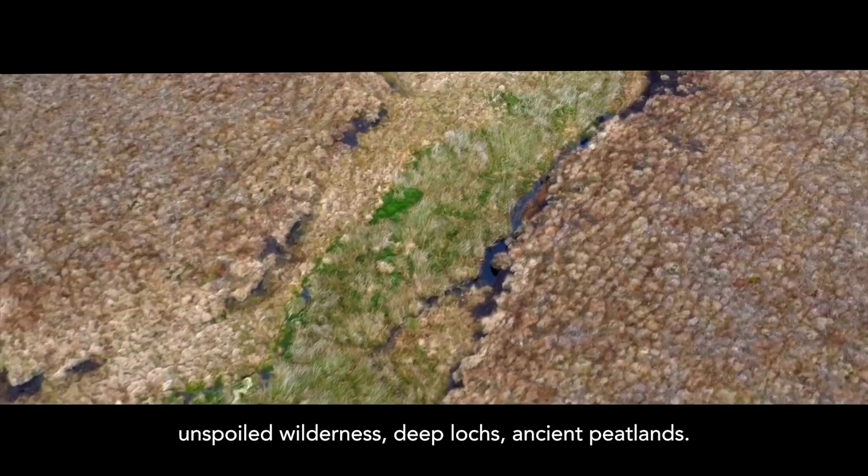Scotland is blessed with natural beauty. Unspoiled wilderness, deep lochs, ancient peatlands. Our rugged coastline spans around 12,000 miles, from wind-whipped beach to surging shore to far-flung fishing ground. For millennia, folk have lived in this landscape and relied on its natural gifts. In our modern world, we still depend on nature, and water is perhaps the most priceless resource on the planet.

In Scotland, we may feel like we get a lot of rain, and due to climate change, it now rains 13% more than it did 100 years ago. But today's rainfall comes in surges, so it's harder than ever to manage Scotland's water. Heavier rain washes peat off the hills, organic matter can make some water discoloured, and warmer water takes more effort, science and money to make safe and pure. To keep our water the way we like it, cool, fresh, clear, straight from the tap.

So let's spare a thought for what it takes to pipe Scotland's water to your home while you run a tap, brush your teeth, take a shower, wash clothes, make soup, enjoy a cuppa, water your plants or flush the loo. Scottish Water produces 1.5 billion litres a day, every day.

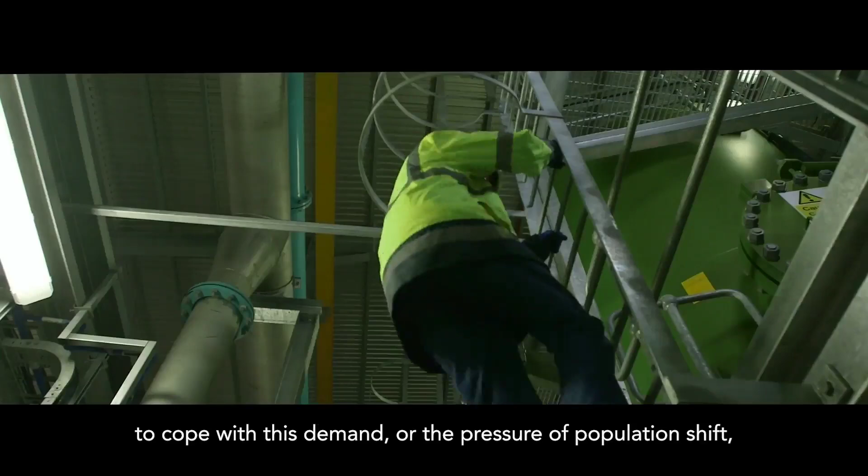The average person in Scotland uses about 180 litres of water a day, far more than people in England and elsewhere. Our infrastructure was never designed to cope with this demand, or the pressure of population shift, or the extremes of climate change. Scottish Water invests over £800 million a year in infrastructure to keep our water system running.

We also look after more than 60,000 miles of pipes, over 2,000 treatment works, and around 300 reservoirs, all to ensure that everyone has access to beautiful, affordable water, but also to ensure that wastewater is thoroughly treated, recovering resources as it's safely returned to the environment.

It takes more than 4,500 people to provide Scotland with quality water and wastewater services we've all come to know and expect. Engineers, scientists, customer service representatives, computer technicians, security analysts, the maintenance teams you'll see out and about in our distinctive vans, even water tasters.

On average, our expert water samplers test the water we supply to your taps every 2 minutes to ensure its purity. The water we all take for granted is a massive undertaking.

Scottish Water is publicly owned, and every penny we make is reinvested for public good. In return, all we ask is that all of us respect this precious resource, to value this astonishing stuff which literally falls out of the sky, because water is vital to the health, well-being and prosperity of the nation to help support a flourishing Scotland.

Scottish Water. Cool, fresh, clear, and only available right here.

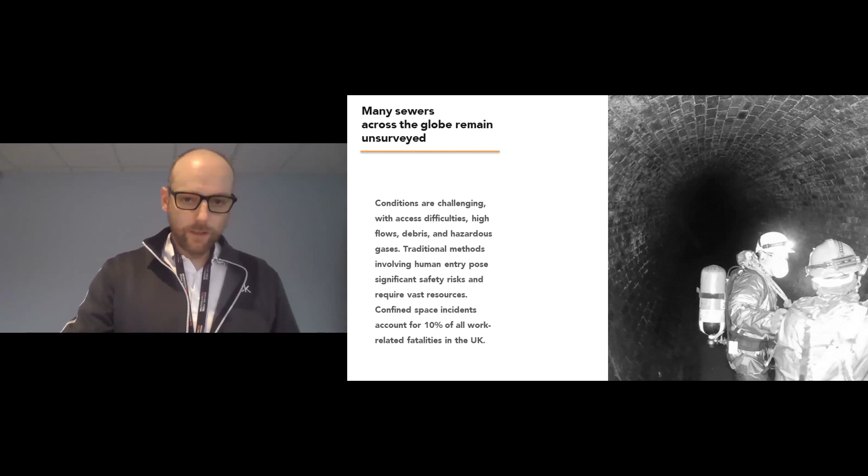Following on from the last slide, the traditional survey methods, such as the crawler or float systems we would normally use to survey the sewers, would have difficulty in some of the more obscure sewer networks. These networks were constructed well over 100 years ago, so the methods to survey are incredibly difficult. A lot of these would require man-entry, which has its own hazards - you've got the slip, trip risk, again the hazardous gases, risk of drowning, and difficult rescue procedures.

A lot of these sewers are in difficult areas, and it's the depth as well that some of these sewers are at. It just creates problems that you want to try and eliminate. So what this does is it leaves many of these critical assets at risk, as no one knows the current condition of them.

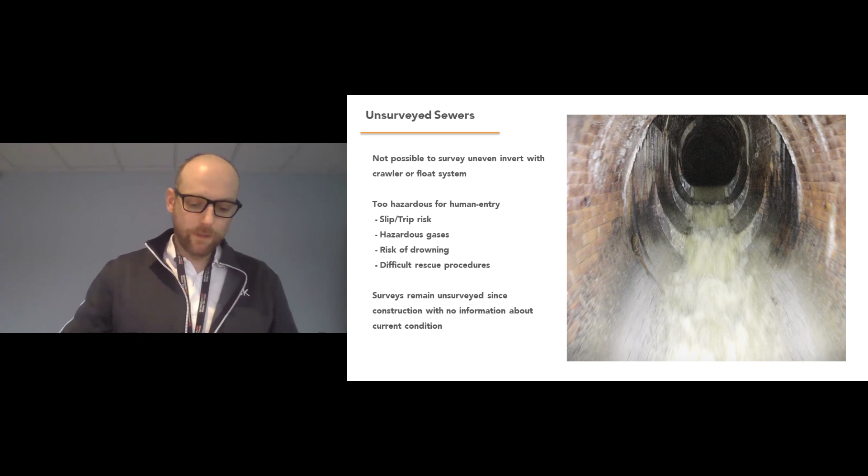As to be expected with these confined spaces, there's a good chance of encountering gas within the networks. As one example that we're currently doing, we have a large survey programme of works up in Aberdeen. There is a mystery, unidentified gas that resides up in that area, so this was one part that we want to try and eliminate, and the drone is ideal for that.

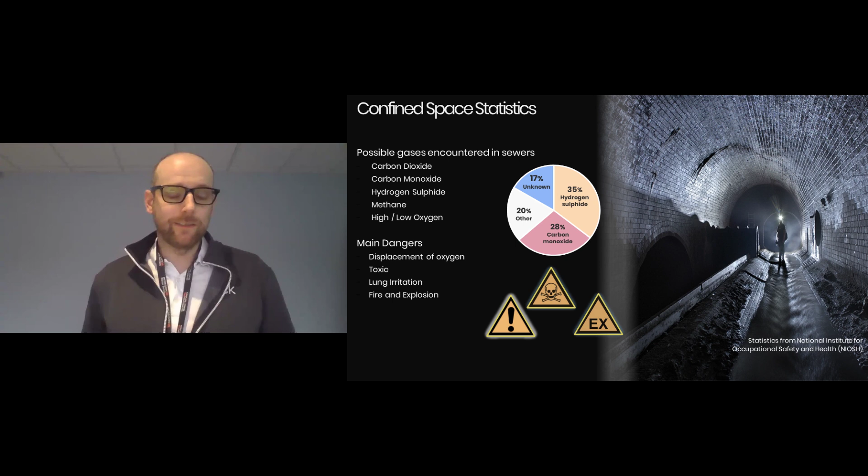So yeah, that's pretty much that one there, and I'll pass on to Thomas.

Thanks, Ross. So yeah, I suppose we've heard about the challenges and the questions asked by Scottish Water and CWA, and also looked at the solution. So this is where it starts to come into the innovation itself. This slide shows the amount of operatives involved in carrying out what Ross described as a man-entry or person-entry into a sewer to carry out a survey - up to 13 operatives on site, fairly extensive traffic management and the risks that go with that, the disruption that goes with that, the excessive use of carbon, if you like, that goes with that, and the time on site.

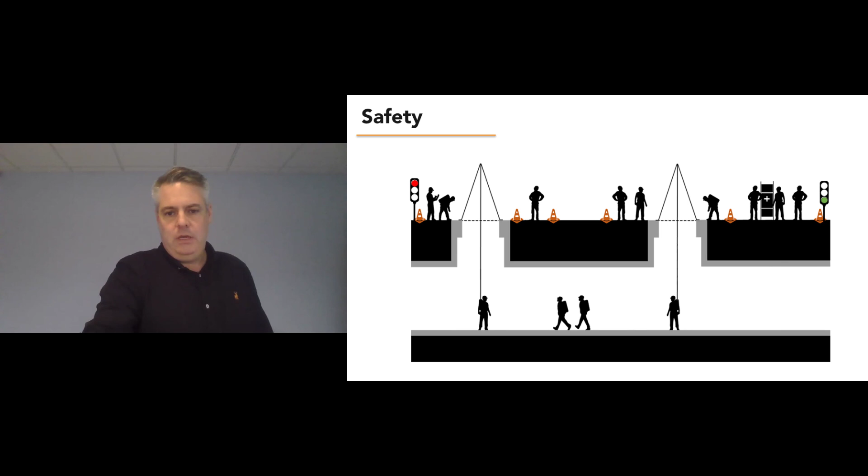So the solution itself, as we say, the drone engineered solution. What do we find from that?

We're finding that we have got increased operator safety, as we discussed. We've got increased productivity. We're able to carry out more drone surveys in a shorter space of time than we previously were able to. Increased quality assurance and accuracy.

We'll talk about that shortly. The reduced carbon footprint that I mentioned. We are reducing the number of vans on site, reducing the number of people needed to be on site, and reducing the disruption to residents, etc. And then there's ongoing initiatives. We can also have a review of where we're going with this as well.

So on the drone itself, we have a high-level view of what we intended to do and where we were this time, probably June 2022, and we'll lead on to some of the projects that we actually implemented this on.

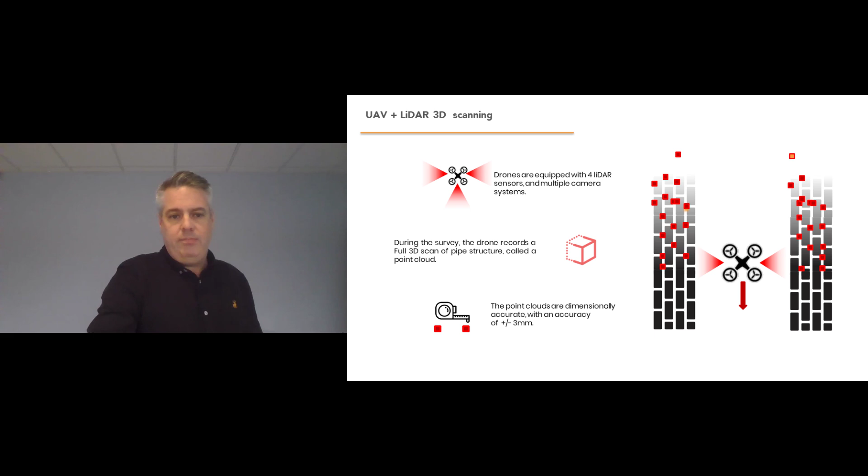At this time, we're now plus or minus 3mm accuracy on the drone output. Again, we can talk about that.

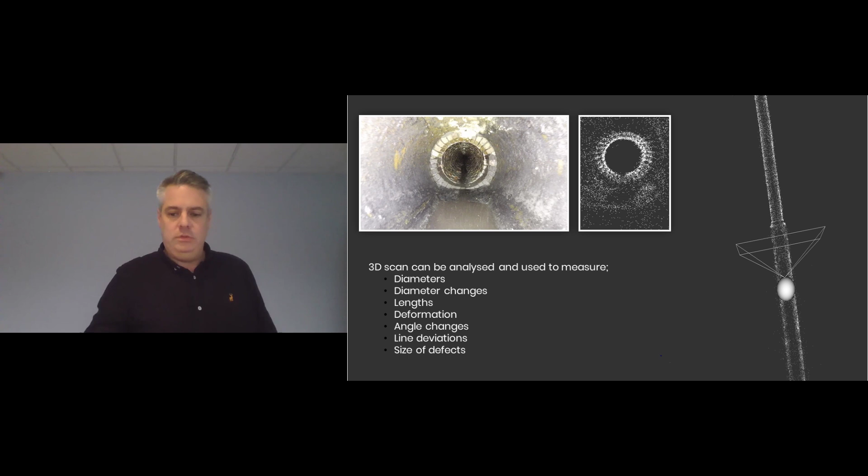All of this comes through the survey, through the LiDAR point cloud data, and the analysis that then goes on the back end of that. So it's given us far more information than we ever had before. And again, more detail as we go through this presentation.

The maiden project that we implemented this on was in June 2022, on Bath Street in Glasgow, named Project Elida. On this slide here, there's a short video. I'll talk about it, play the video, and then we carry on with the presentation.

On the left-hand side, you can see the point cloud data. On the top right-hand side, you can see the video output. And what you will see as the drone flies through the asset is where it passes beyond a traditional crawler survey limit, which is a theme that you'll see later on in the presentation. So if we can just press play on that now, if that's okay.

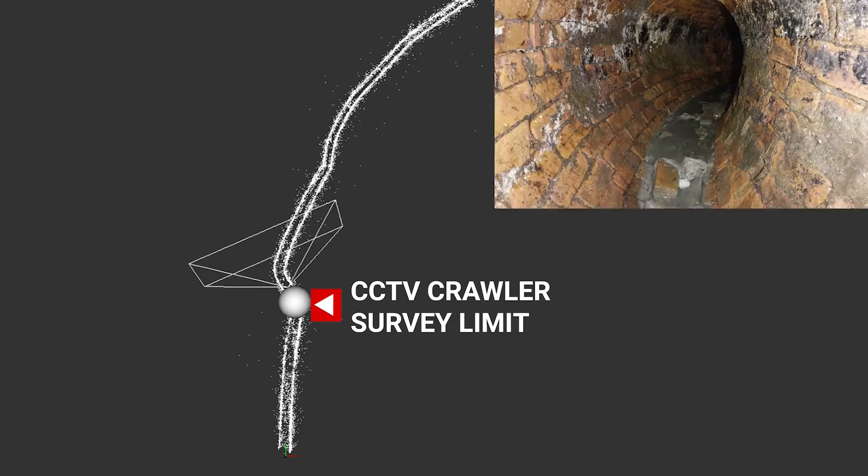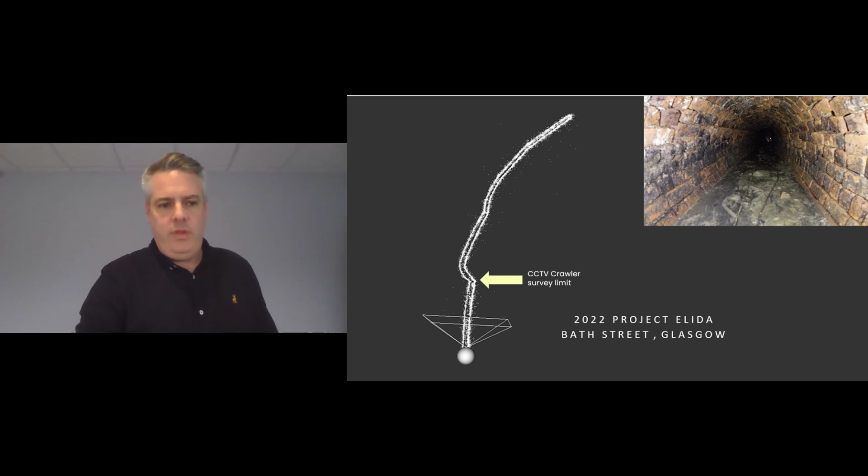So what that output showed us from the original GIS input, if you like, was this is the original route, the original location plan shown in red, and then the updated LiDAR plan shown with the point cloud data there in the green on the left-hand side.

Huge difference in what we expected, huge difference in the information that we had, and it now allows our client ultimately to see exactly what is happening with their asset, where it is, and any issues that are associated with it. So you would have seen the defects that we've picked up on. We now have a second challenge, which is to now remediate and rehab that asset, but that's for another webinar.

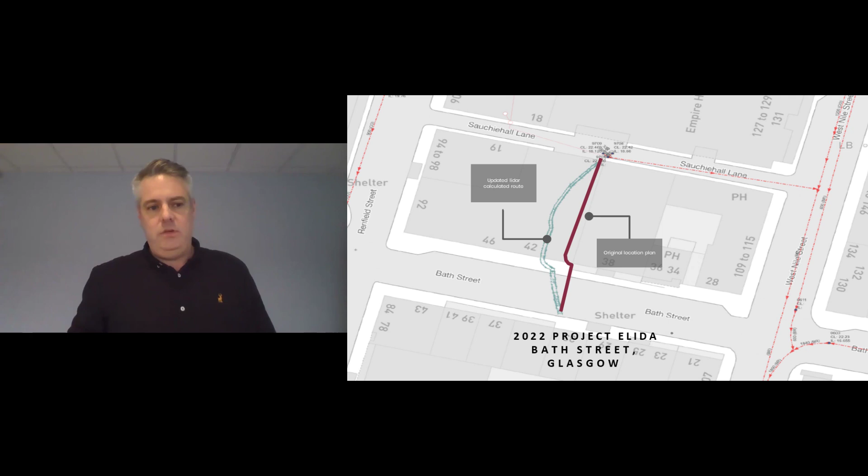So what I'll do now is pass on to Mark Mitchell from Northern Ireland Water, who'll give you an overview of how we took this investigative innovation and pulled it into an actual repair solution. Thanks.

Thanks, Thomas. Hi, everyone. Afternoon. As Thomas said, I'm going to chat a wee bit about Queensbridge siphons, which are under the River Lagan in Belfast and have been since 1910. These were installed, they're approximately 4 foot diameter and 30 foot deep, or 1143 millimeter and 9 meters deep.

You can see from the slide the location, and if this was a shot that was taken back when these were being installed, just underneath the N and the S of Queen's Bridge siphons on the top, there's a building there, and that's the Titanic Centre, where the Titanic was sitting on the dry dock as these were being built. So we're still using these. Very sad story of the Titanic, but also the Olympic was there at the same time.

But anyway, back about the turn of the century, we realised the siphons were not performing as they should be, and we did a bit of investigation. We knew the siphons were - the north siphon in particular had a problem, and it was blocked, and we weren't getting the flow through at all.

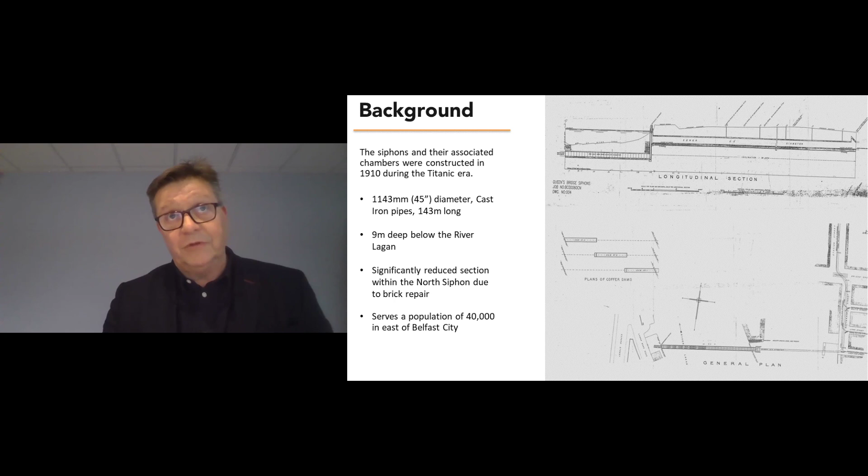So we thought, as per usual, the natural thing here is let's see if we can have a look at them. But push comes to shove, we'll employ one of our tier one contractors who will cofferdam this and replace the siphons. Dig down, excavate it out, and replace them in the conventional manner.

We did a bit of investigation and a bit of a look, and we could see the siphons were in a terrible state internally, and so this refurbishment was going to cost us around £20 million. That's 32 million Canadian dollars at the time of going to press.

Dear knows what it is now, but with our wonderful political system, we have prime ministers jumping in and out of bed.

But anyway, what we have here is a solution that was going to cost me 20 million. I employed Dawson-WAM to have a look at it, and I'm going to pass over to Jared, who's going to give you a bit of an insight into how Dawson-WAM approached solving the problem.

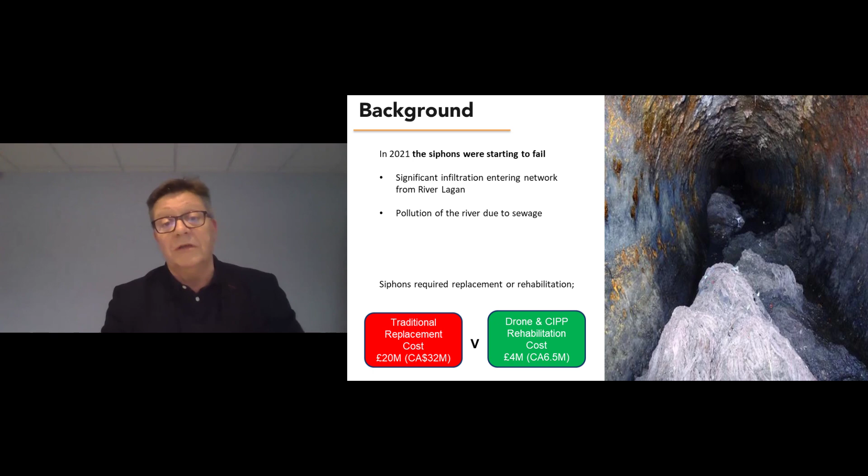Thank you, Mark. Just to put the scheme in context, we were awarded this contract back in early 2022, and we appointed Environmental Techniques Aegion as our specialist subcontractor. CIPP lining was proposed as the preferred repair solution in lieu of the traditional heavy civils replacement.

One thing that Mark alluded to, there were significant problems in the north siphon, and as you can see here from the diagram on the scheme, we actually identified that there was a diameter change in the north siphon. We then found out that this was because the north siphon was damaged during extensive bombing in the city during World War II, and it was repaired thereafter.

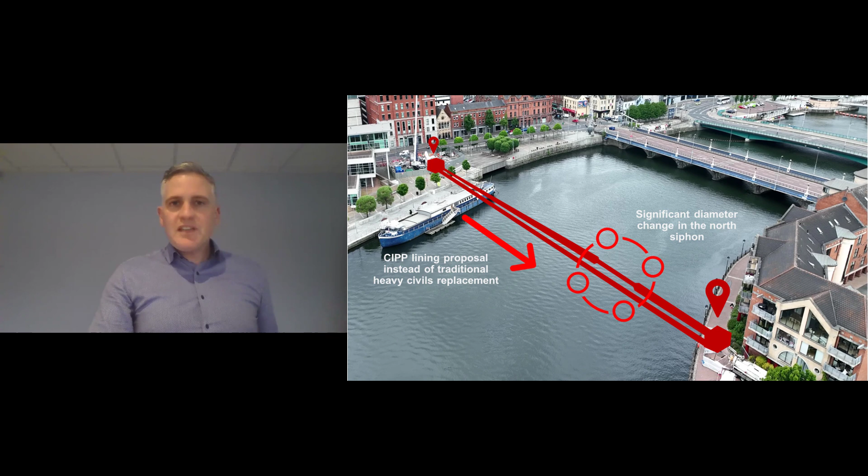So this proved a significant challenge for us because we needed to measure this siphon accurately to make the liner fit. So what we did was, and Thomas had alluded to some of the footage earlier, we used drone technology to survey both siphons, but in particular we used it to identify the north siphon and this change in diameter and to measure it accurately.

So now I'm just going to show you a short video of that north siphon. So you could play the video, please.

So as you can see, with the level of detail that the drone was able to give us with the then 4K imagery, which is now, I believe, up to 12K, we were able to clearly identify that not only was there a significant diameter change, but you can see the clear transition between the old cast iron to the repaired brick solution, and that ultimately identified what the problem was with the choke in the northern siphon.

So here you can see, similar to what Thomas showed earlier in his scheme, this has been overlaid. So we have the original route, and we had just assumed that there's about 143 meters of distance between the chambers to the east and the west of the river between the siphons. We had assumed that it was just a lovely straight line between each, which is identified as a red line. And then when you use the 3D imagery we received from the drone, you can see the green line overlay, which shows that it's far from that.

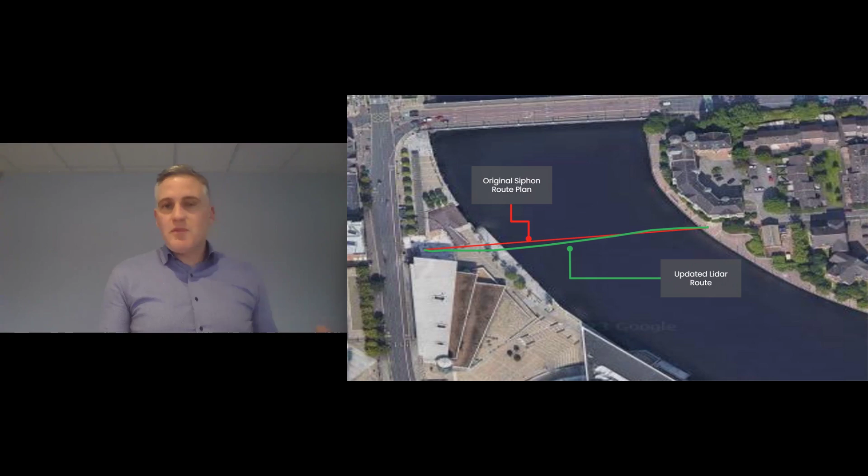Why is that important? Well, now at least the client has a very accurate position of where their asset actually is. And furthermore, if we were using the traditional open cut methods and going in to put in a cofferdam, lo and behold, if we assumed it was in a straight line, we probably would have ended up hitting it with some of our temporary works sheet piles right down through it, which would have caused even more problems.

So this is the output from the LiDAR 3D imagery. So you can clearly see here not only the change in diameter of the siphon, but as well the change in the verticality of it. So you can see here over a 15.9 meter section, which was shown in the video earlier, the diameter changes from 1143 down to 870 and back up again.

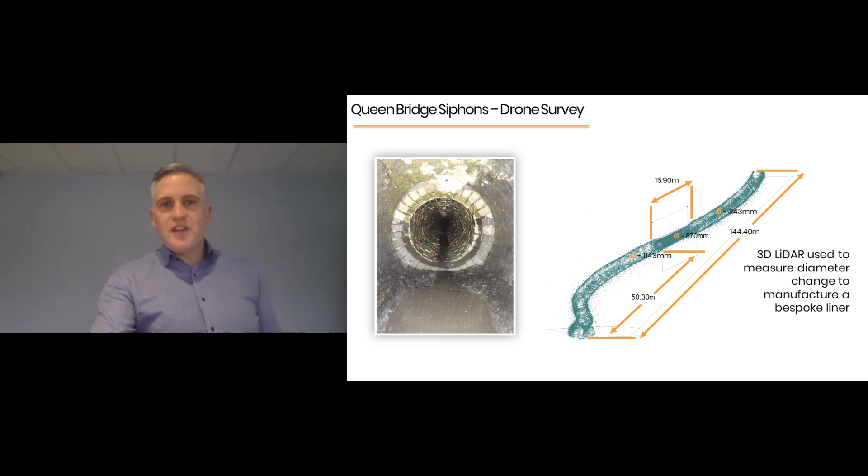So this was really a digital twin of what was actually in the ground and allowed us to go and manufacture the CIPP liner accurately. Here are some images of the installation of this liner, which happened in late spring, early summer 2022, of Environmental Techniques Aegion actually on site.

Just to put the thing into context, the liner was manufactured and wetted off-site in Europe and then transported to site via refrigerated container. The liner itself, as you can see, has been installed by a crane. It was in the region of 18 tons each liner, so significant weight and a significant logistical problem to get it actually down into the pipe itself. And the wall thickness was in the region of 19 millimeters. And I have to say that everything went really smoothly on site and was installed very successfully.

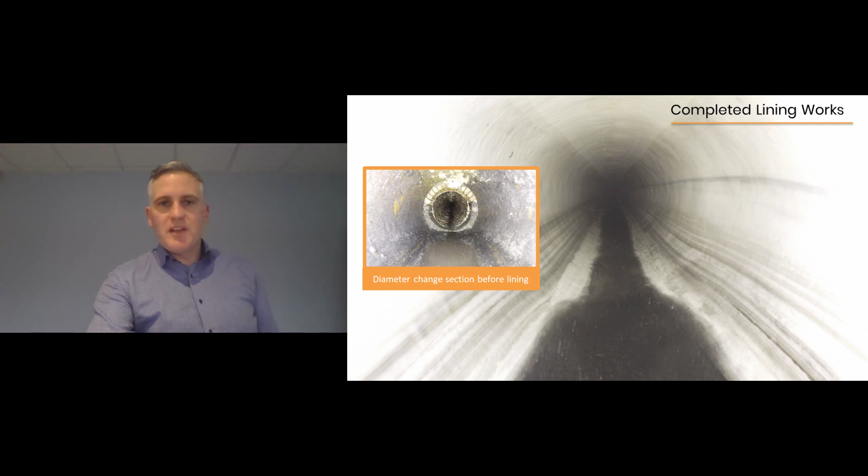So much so, here you can see the transition where we had the change in pipe diameter in the north siphon on the small inset on the left, and there is the transition of the finished product, which is pretty much seamless, I think you will all agree. So absolutely a real success.

And then just finally, on the drone and the program improvements, initially we were expecting a 32-week delivery of this project, but by utilizing the drone technology, we were able to deliver the scheme about 8 weeks quicker. Why was that? Well, ultimately, if we were using the traditional means, like the track unit to measure and survey the siphons themselves to measure for the liner, we would have had to clean out the siphons. With the drone we gave them a quick clean, didn't have to do it extensively, just enough room to get it down. And then with the digital twin, we were able to be manufacturing the actual liner while we were then extensively cleaning out the siphon for its arrival on site. So all in all, that led to about an 8-week saving by the use of the drone technology.

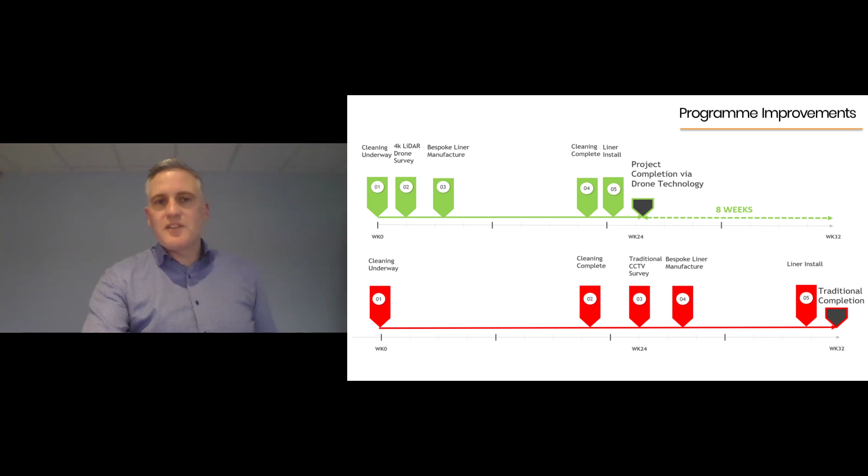Thank you, Jared. Yeah, I suppose one of the things we haven't mentioned, and this was a major saving, was significantly reducing the carbon footprint. Really, we set off on this journey to increase the safety of our operatives, to reduce the number of people we were putting into a confined space. But as a byproduct of the LiDAR and the enhanced CCTV footage of the sewers, we've really improved the accuracy of the surveys.

Another thing that Thomas mentioned earlier was the reduction of the amount of traffic management to enable the surveys to be undertaken. We reduced the time taken. One of the other presenters spoke about that as well. So all in all, a huge reduction in carbon footprint. And that really is aligned very much with Northern Ireland Water and Scottish Water's net carbon zero aims. So now I'd like to pass over to our last speaker today, Jack Hutton, who's going to talk in a little more detail about what this adapted drone technology can do. I'll pass you over to Jack.

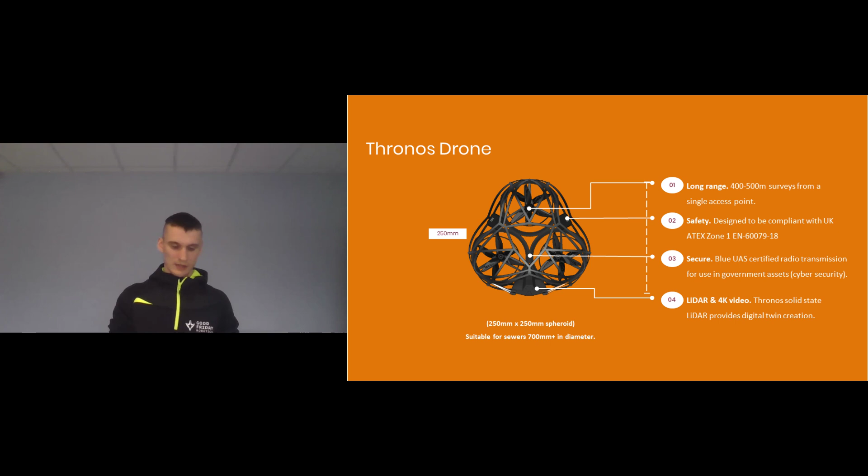Whenever you fly a drone in a small diameter tunnel, you start to get very strange aerodynamic effects, as essentially you have high and low pressures and moving air, which means that the pilot cannot react as fast as the drone will actually react to the changing airflows. So we needed to put in a number of different autonomous systems to allow us to operate in these ultra confined spaces. One of these was LiDAR, and that was just to help us stabilize the drone in the middle of the tunnel. However, it was very quickly pointed out that since we were LiDAR scanning the whole thing, we may as well actually use that as an output.